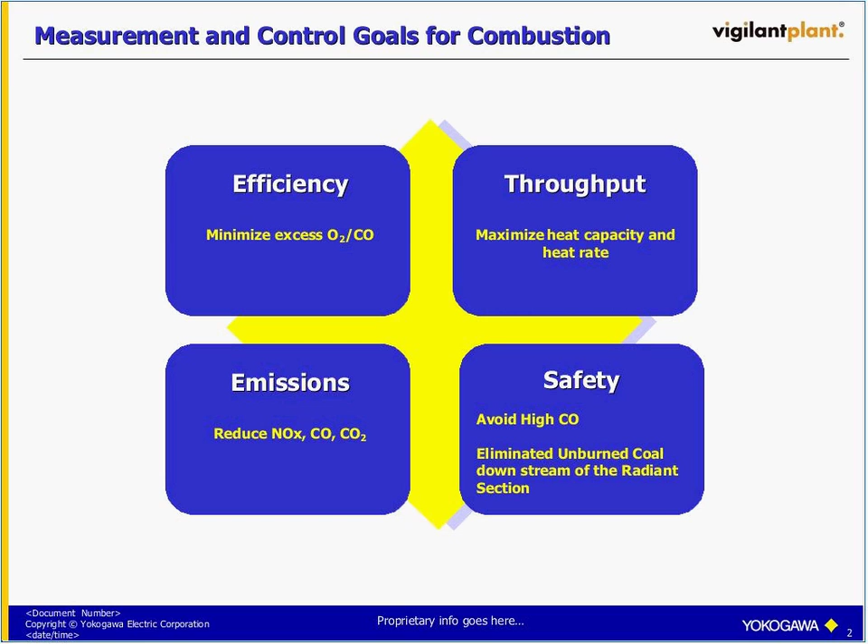In the past, the primary means of understanding what is taking place in the combustion process has been measuring oxygen, and there are several reasons for that. First of all, it has been the easiest to measure. The zirconium oxide technology has a very long track record and has been proven reliable and is obviously well documented. The average oxygen content of the flue gas typically changes in a very gradual manner when the conditions are changing, and those conditions can be quite vast.

CO, on the other hand, has been very challenging to measure for the industry, despite many efforts of many kinds. Even when you are able to measure it effectively, the dramatic changes of concentrations can make it difficult to control off of. So we are not advocating control with CO, but rather using CO breakthrough as an indication of the optimal excess O2 level.

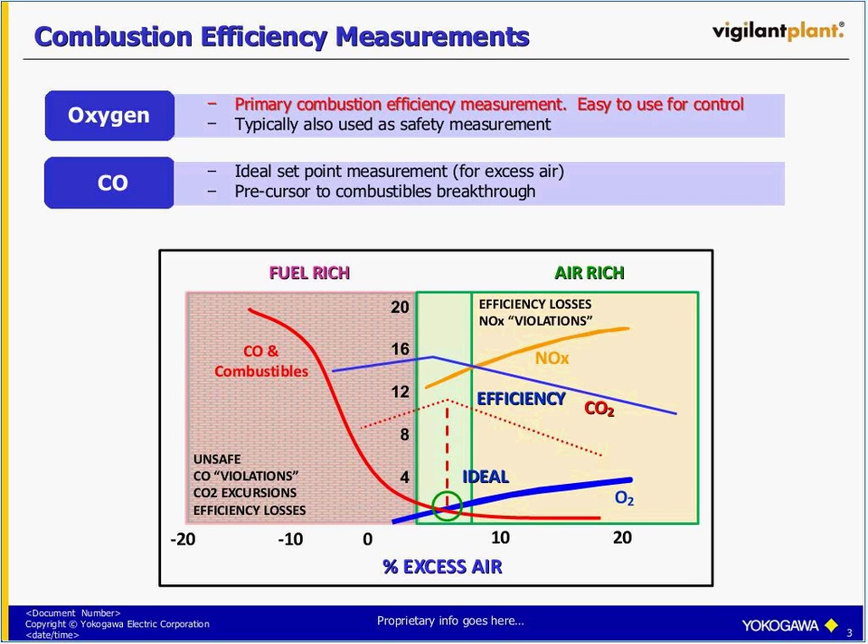On the chart here, it's a fairly typical graph showing the relationship between oxygen and CO, where on one side you're fuel-rich and one side you're air-rich, and the goal is to meet somewhere in the middle. But where is that optimal O2 set point?

Some people have said that on their system it's 2% or 1% excess oxygen. Some plants run at a much higher level. But we believe to gauge that, you must have some type of indication other than just oxygen, because there are many factors to consider.

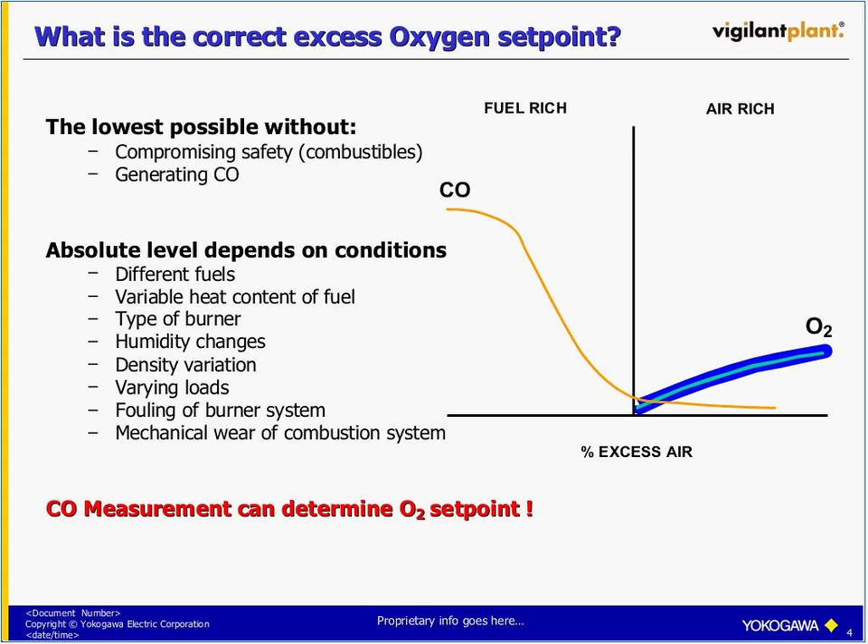So we think that it is the lowest oxygen set point possible without generating carbon monoxide. And all of this can change continuously in your boiler with different BTU values of your fuel, different burner wear. They're not all burning the same. Several factors can contribute, and that is why we believe the diagnostic of a CO measurement can absolutely determine where that O2 set point should be.

On a gas-fired system, safety is much more important because the raw fuel can be explosive downstream. So in many cases, when they do not have a diagnostic of carbon monoxide or any type of fuel downstream, they run on the safe side, which is the air-rich side.

So before these analyzers, these tunable diode lasers, were installed on their process, they ran at an average of 4.5% oxygen. But after they installed these TDLs, one measuring carbon monoxide and methane and one measuring oxygen, they had an operator test where they drove the oxygen value down.

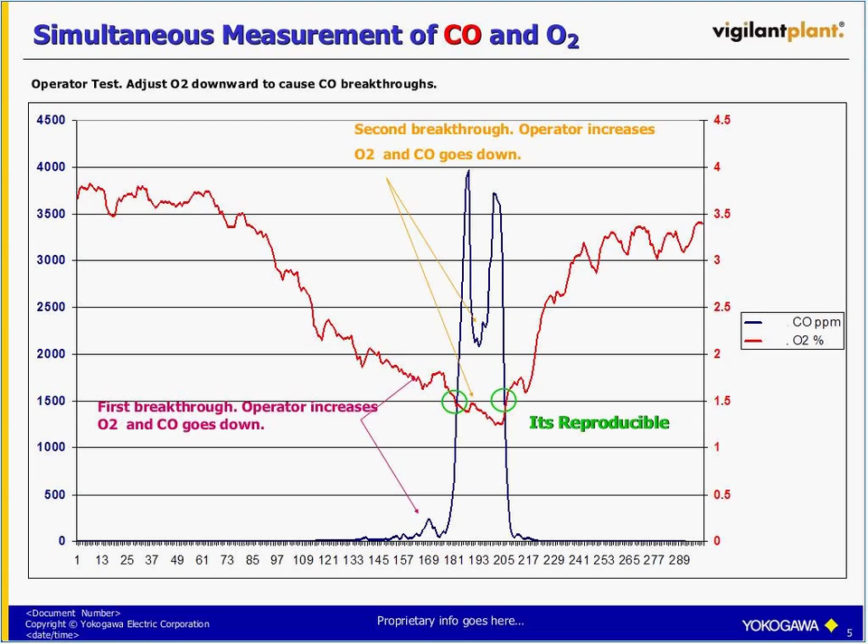So this is basically a summary of what we've talked about so far. The ability to detect carbon monoxide crosses a number of key factors in the combustion process. So not only does it allow you to reduce the amount of excess air, which increases heat capacity, but also gives you an early indication of a fuel-rich environment.

There are some considerations that have to be taken when choosing a technology. Placement at a crossover or radiant section, nose arch, radiant, superheater, before the CO has a chance to afterburn or react with oxygen and convert to CO2.

Also, coverage across the burners to measure breakthrough at any one point. We call it a path average that the laser is performing.

Sensitivity to allow parts per million measurement, which would result in a safe O2 level, speed of response to allow reaction to changing conditions, and low to no interference from other combustion gases such as CO2, moisture, or any type of combustible.

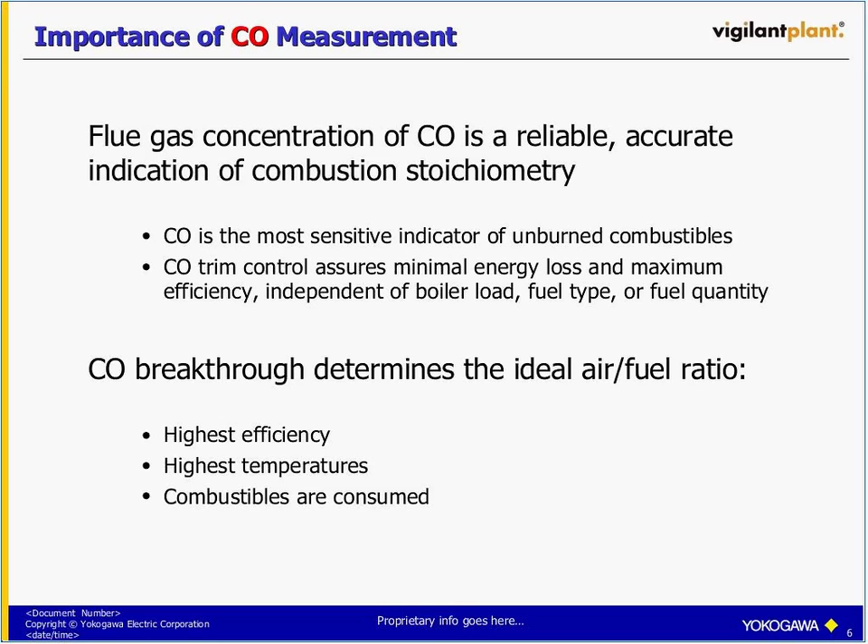So why isn't everyone in the industry making this measurement? Well, most of the technologies that have been available were not designed specifically with pulverized coal business in mind. One of the original technologies for measuring combustion gases that had early and sustained success was catalytic bead sensors.

A later revision to the technology was using a solid-state metal oxide semiconductor. This eliminated the consumption of the catalyst and extended the life of the sensor. Even with this advancement, the sensor must come in contact with the target gas to generate a signal.

Another analytical technique that was implemented for measuring combustion gases was the NDIR, or non-dispersive infrared filter photometer. The design of this system is much more conducive to the harsh nature of the coal power industry. The main reason for that is the sensor never comes in contact with the process. This greatly extends the life of the sensor, and it works on the principle of infrared vibrational absorption spectroscopy.

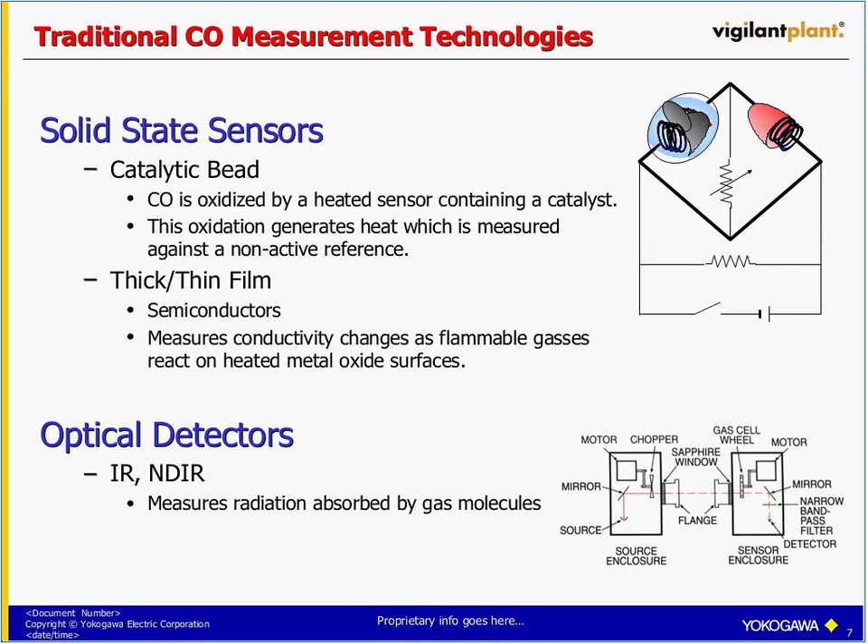The solid-state sensor technique, because of the harsh environment, has to have some type of extraction system, meaning that you have to take a sample out of the boiler, put it through some type of filtration system to clean it up, and then pass the flue gas over the sensor.

So because we have a filter involved, this filter has to be cleaned, and you could imagine with the mass of fly ash that's going by, that filter would need to be cleaned very often. So while this system can work, it does require a lot of maintenance.

So this also only gives you a single point of measurement, whereas a boiler can have a very large volume. You're just pulling out a single point of the boiler to try to represent what the overall value is of the carbon monoxide.

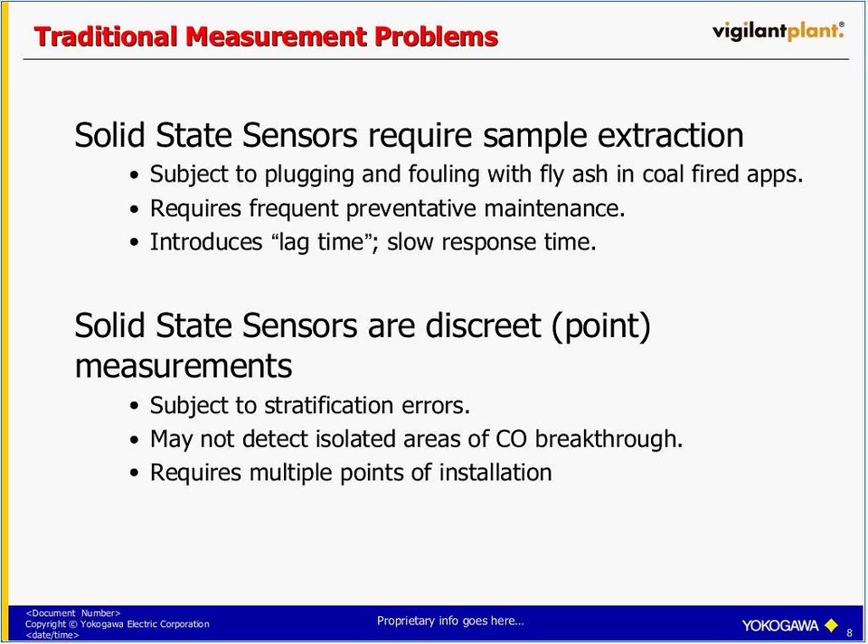The NDIR technique, while having superior advantages, has some limitations. One of those limitations is temperature. And this type of technique can only be applied downstream of where the actual combustion is happening. And when you take a measurement of carbon monoxide far from the fire, you're getting a false low value because the CO is reacting into carbon dioxide.

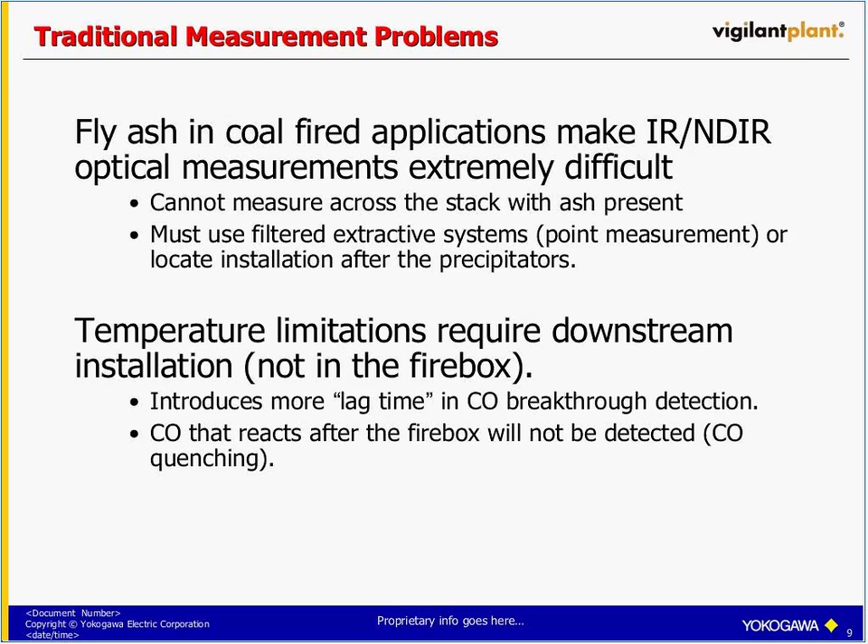So with the traditional or early techniques of measuring carbon monoxide, there were also some accuracy considerations. With the solid-state sensors, the catalytic bead or the thick-thin film sensor, the accuracies list 2 to 5% of reading. But that's not necessarily what the actual reading might be. NIST and several other affiliations have performed their own tests, and these accuracies have been a little bit more loose than the stated accuracies from the manufacturers.

The thick-thin film sensors also have a little bit of interference from SO2, NO2, and water, which can be inherent in combustion gases. Also the NDIR definitely has interference from CO2 and water, which in any combustion is the goal, is to have CO2 and water, which are the radiant gases.

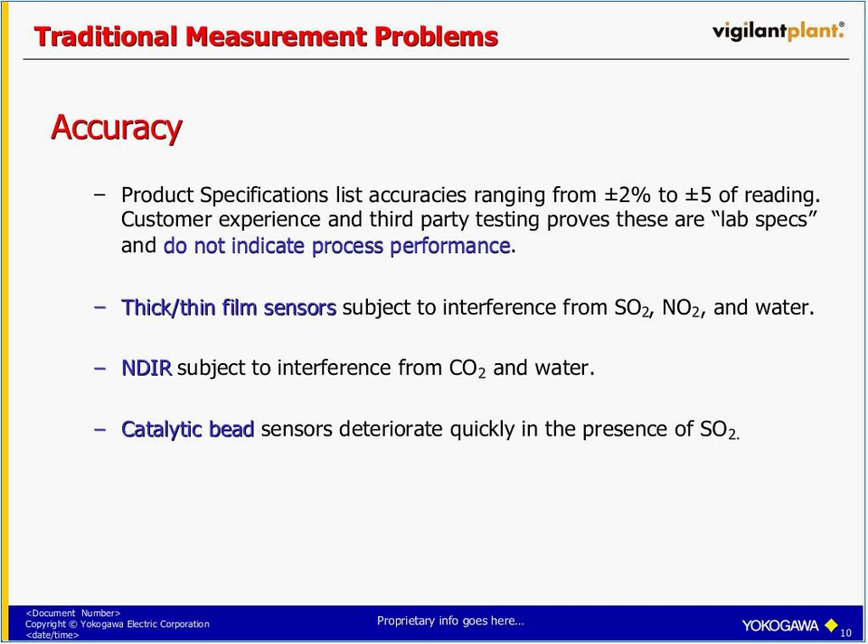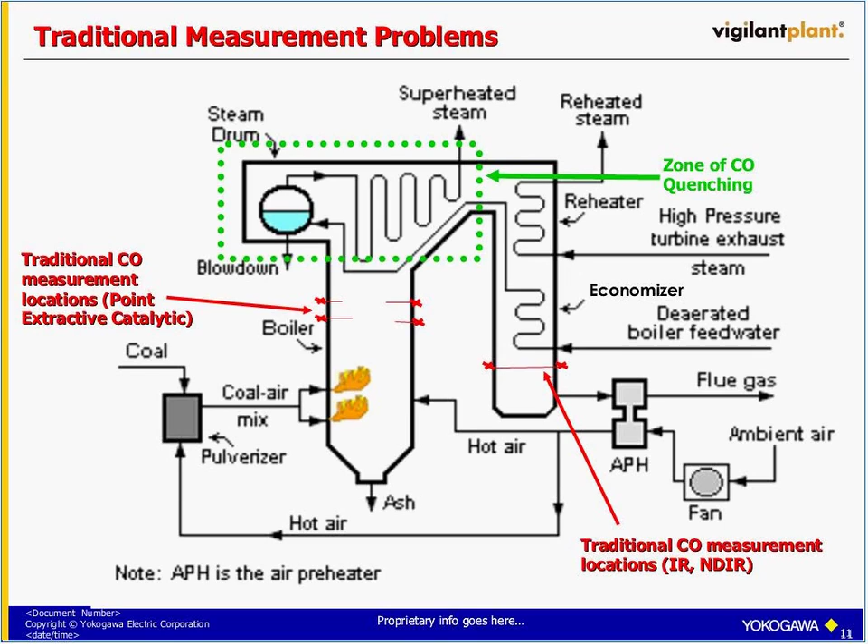But as you can imagine, you have this fly ash in a plasma-like state, and trying to pass that through any type of filter system can be incredibly problematic. And then to deal with the temperature limitations of the standard infrared type analyzers, it had to be downstream of where the CO is being quenched. So these are the considerations for the traditional technologies.

So I'm not going to go into great detail about the TDL technology, but it too is an optical device, and the sensor does not touch the process. However, this laser technique does not have the same temperature limitation, so we can utilize this technique anywhere in the process, whether it's hot or cold. So, to give you the optimal CO value, we can put it directly in the radiant section, superheater, etc., to give you that most realistic CO value.

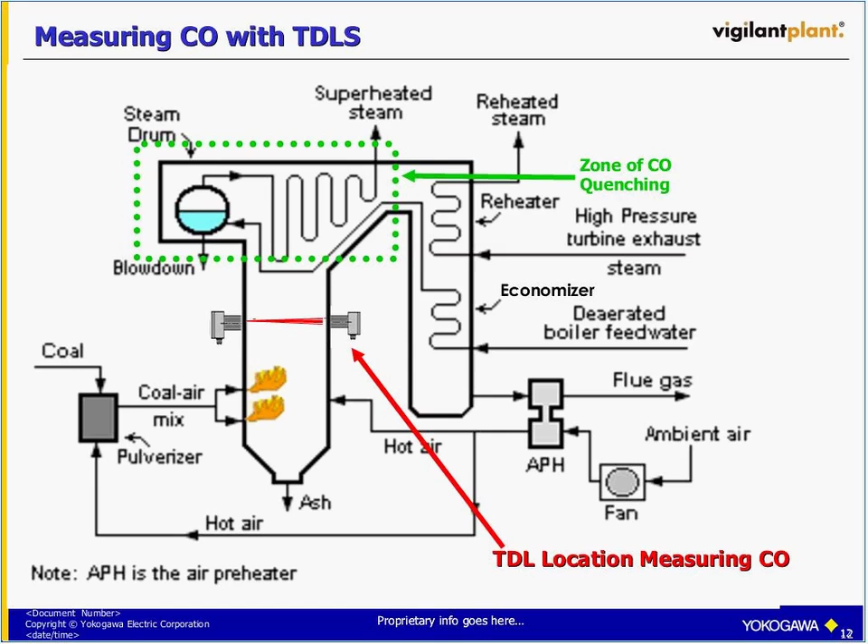So some of the simple advantages of a tunable diode laser system is that we can give you that measurement in the firebox, which gives you the most representative measurement. Also, it is an in situ or across the firebox measurement. So we have no sample system which could potentially fail or need maintenance. Also, this reduces the lag time.

Most TDL systems have a response time of less than 5 seconds, and this is a full step change, whereas most analytical techniques have a time response factor, and this can be 30 seconds, a minute, 2 minutes.

Also, this optical technique, whether it's NDIR or TDLS, gives you a path average measurement. And this simply means that we're counting up all of the carbon monoxide molecules in between the source and the detector, and then averaging that over the entire span. So we're giving you basically an infinite number of points all in one measurement.

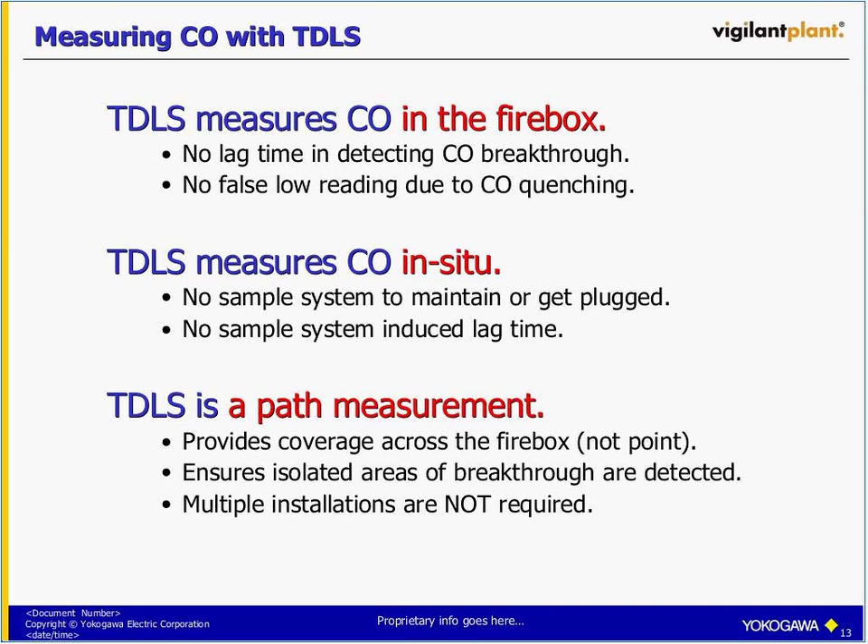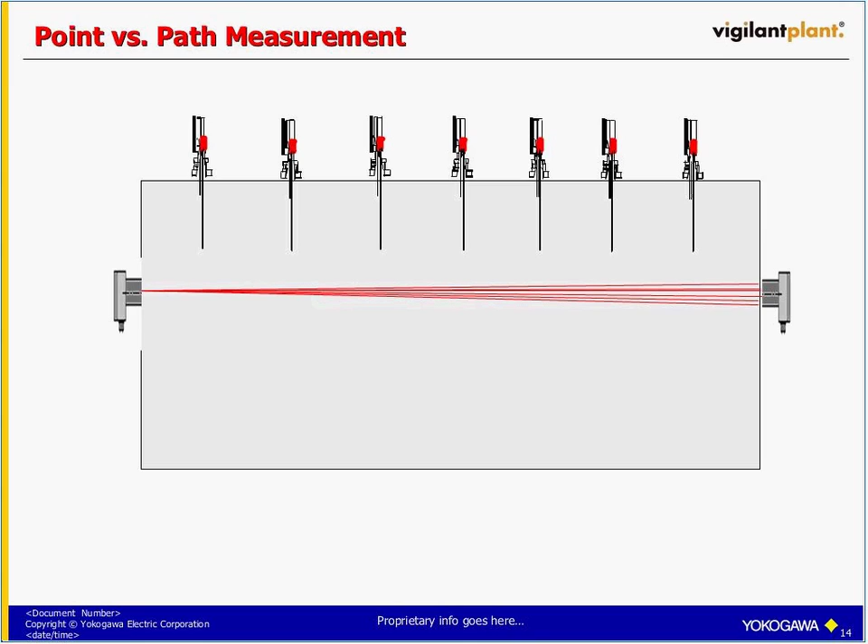With one tunable diode laser analyzer, you get the entire path average with just one instrument. And the reason that this is important is because stratification is inherent with any combustion system.

This graph you see here was made with a portable oxygen analyzer, and we just held a probe out at different lengths over an area of the radiant section and found that there was a dramatic difference in the oxygen concentration values. Now, these values would directly reflect what the carbon monoxide values were. Where you would have low oxygen, you would have high carbon monoxide. So one specific analyzer would not tell you what each area is, but rather give you an average of the whole.

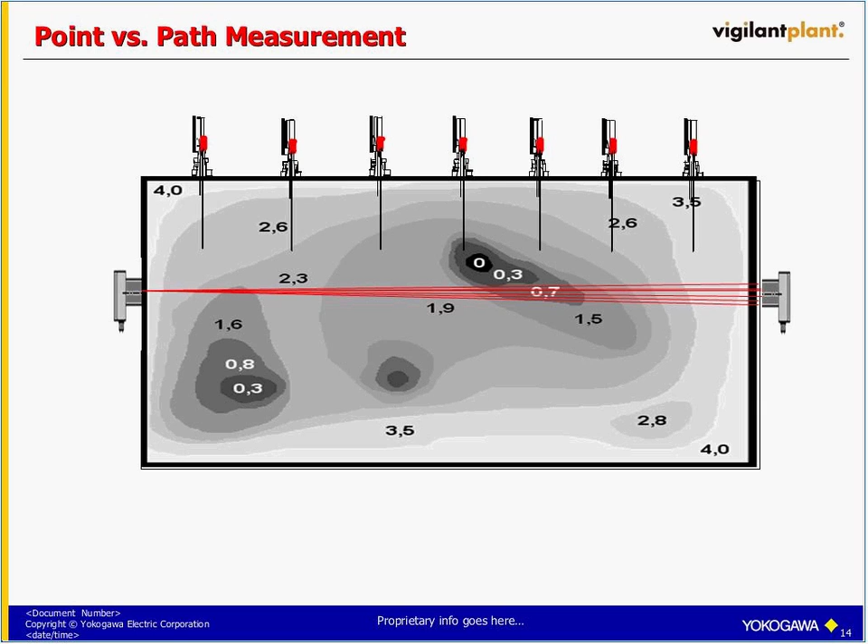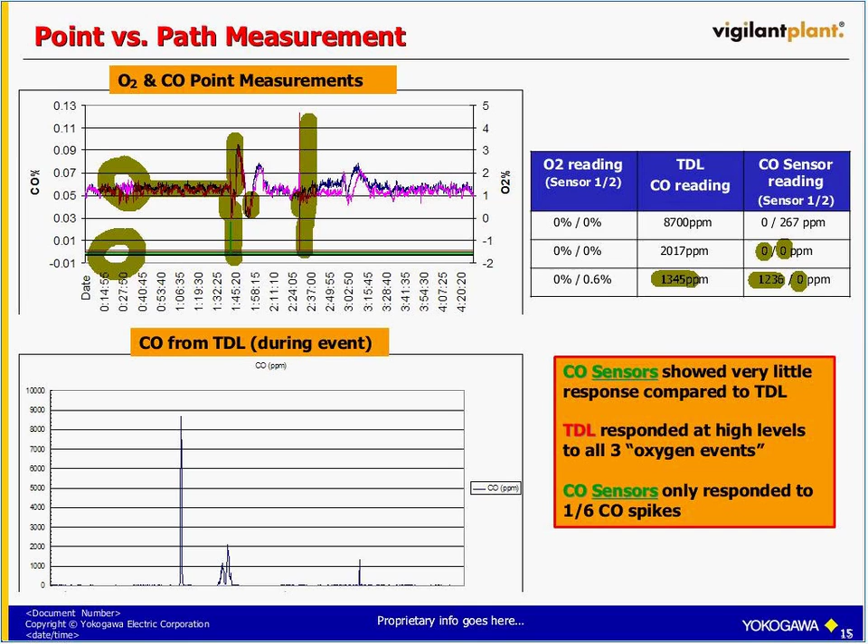So this graph is specifically designed to help you understand the advantage of a path average over a single point sensor.

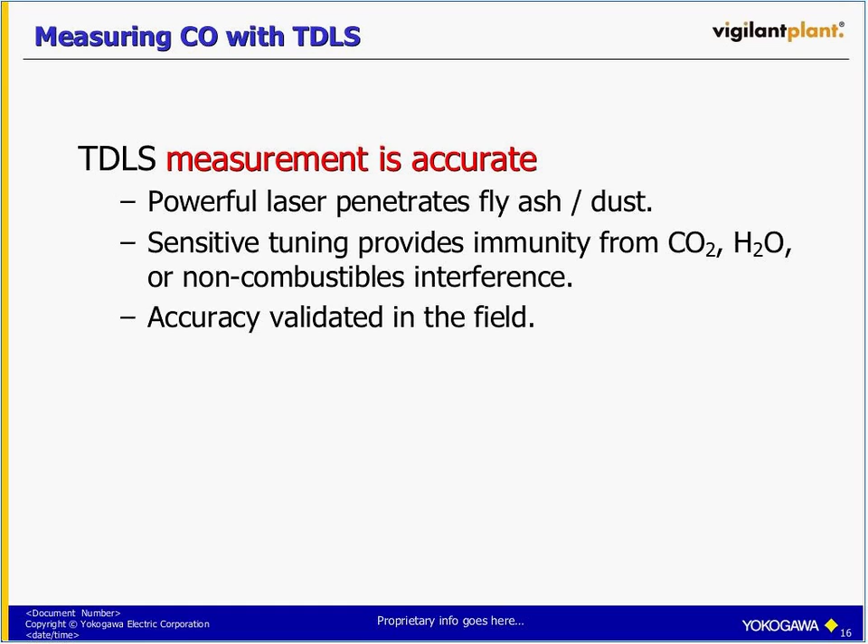Some of the simple advantages, as an attribute of the type of technology, is the accuracy of the TDLS system. We are using a very coherent light, a monochromatic light, producing a single color, and we can focus that light to whatever size diameter beam that we need for the distance across the boiler. Because we're only producing one wavelength of light, we can be very specific in just measuring the carbon monoxide infrared absorption and not have to worry about CO2, moisture, SO2, or other gases that could potentially interfere with other types of technologies. And we've also validated this information in the field.

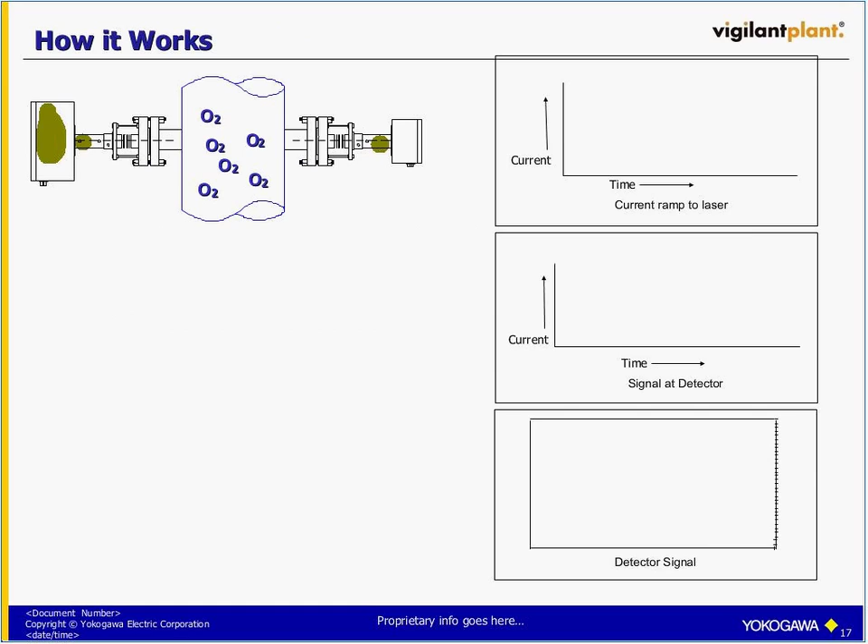So how the tunable diode laser system works: on the left-hand side here, we're showing you our laser controller, this box here. This has a computer in it and a laser controller. And then we have a laser that's inside of this barrel that's mounted directly in line with a detector on the other side. Whenever we turn the laser on and tune across the peak of interest, which is why we call it a tunable diode laser, we introduce a small amount of current change over a constant period of time. And this happens at a rate of 1 kilohertz, or 1,000 times a second.

So what the laser driver is showing is this current ramp here in this box. What the detector sees on the other side, if there's any CO gas present, or oxygen if that's our target, would be here. You would see a loss of light over the current ramp. We take that signal produced from the detector and amplify that milliamp signal into volts in this box here, and then transmit that back over to the controller for interpretation. We take 1,000 measurements a second over about 5 seconds, which we can do more or less if the customer wants. And what the analyzer would interpret is this absorption peak here, and then we interpret that into gas concentration. It's a relationship between the amount of light that made it across and the light that is actually absorbed. And the delta helps us to interpret the gas concentration.

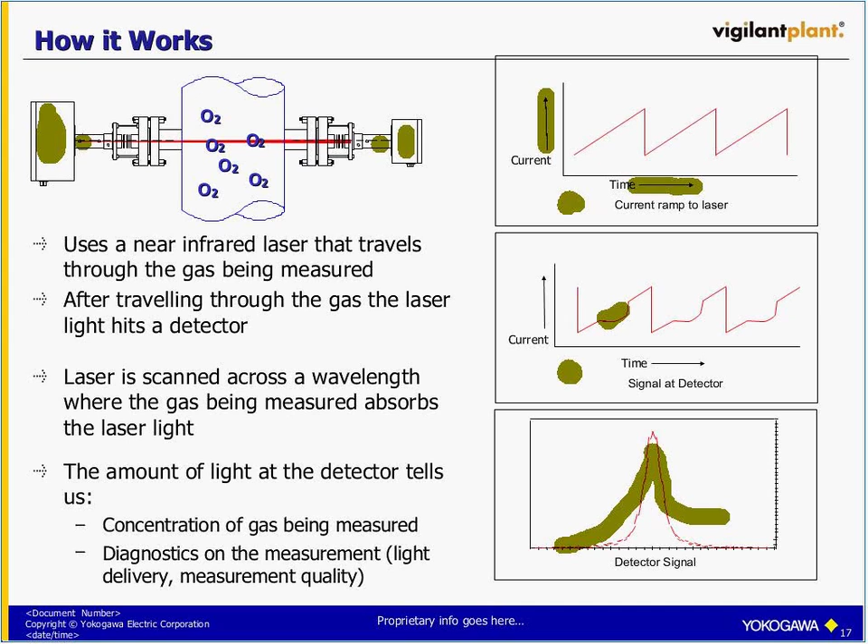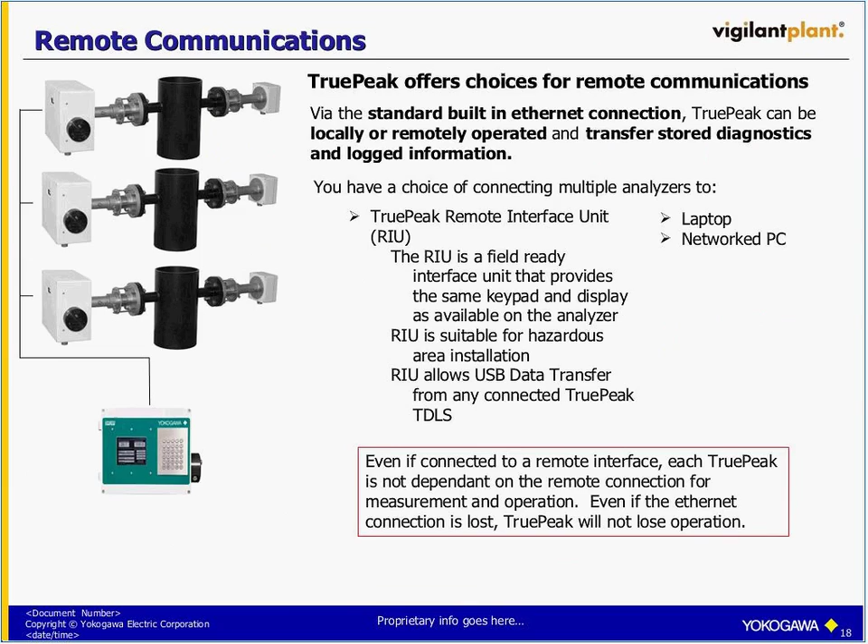So we seriously advocate the type of analysis we make by putting the laser directly in line with the detector. There are other tunable diode laser companies that transmit the light from a remote controller via fiber optics up to the process. Now, we have done a thorough investigation and due diligence on our part to try to find the advantages of this type of system. But we believe that having the laser and detector directly in line with no components in between greatly increases the uptime and reduces the failure rates of the system.

Now, one great advantage of having the laser and detector directly in line is that we can use a wavelength of light that allows us to have a very high sensitivity to carbon monoxide. To our understanding, these fiber optics have a bandwidth of light that they can transmit through them, and that bandwidth does not include the wavelength of light that we're using for this high sensitivity CO measurement. So our typical accuracy for a coal-fired boiler in the radiant section is about 5 ppm.

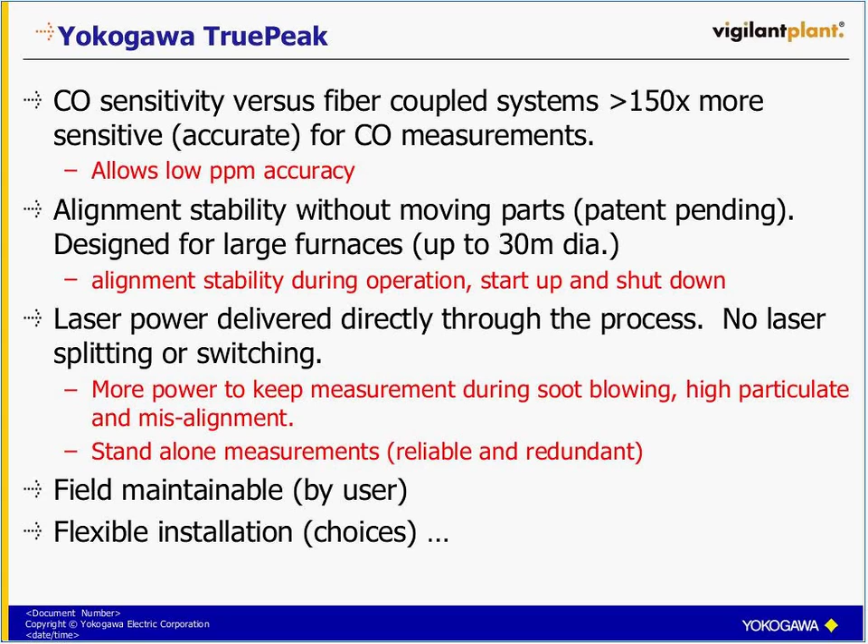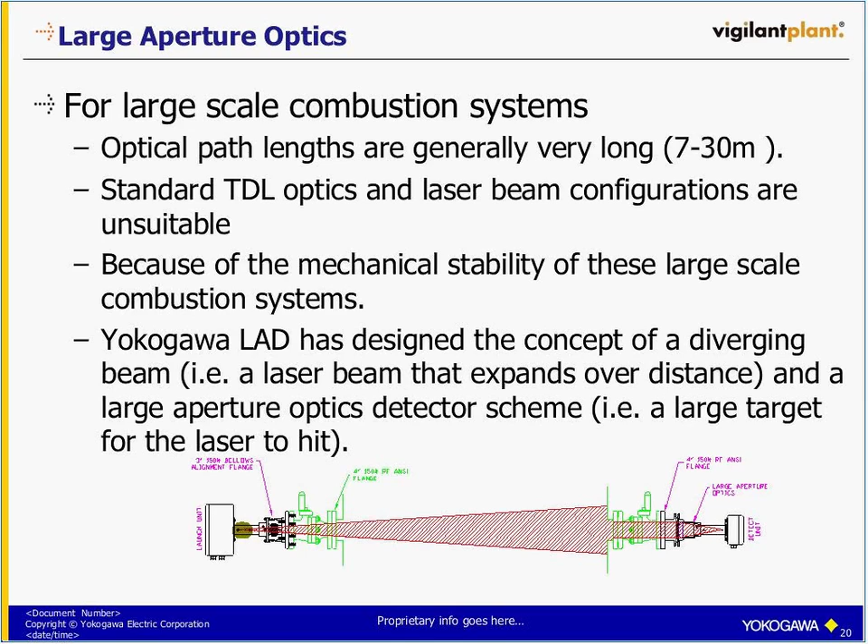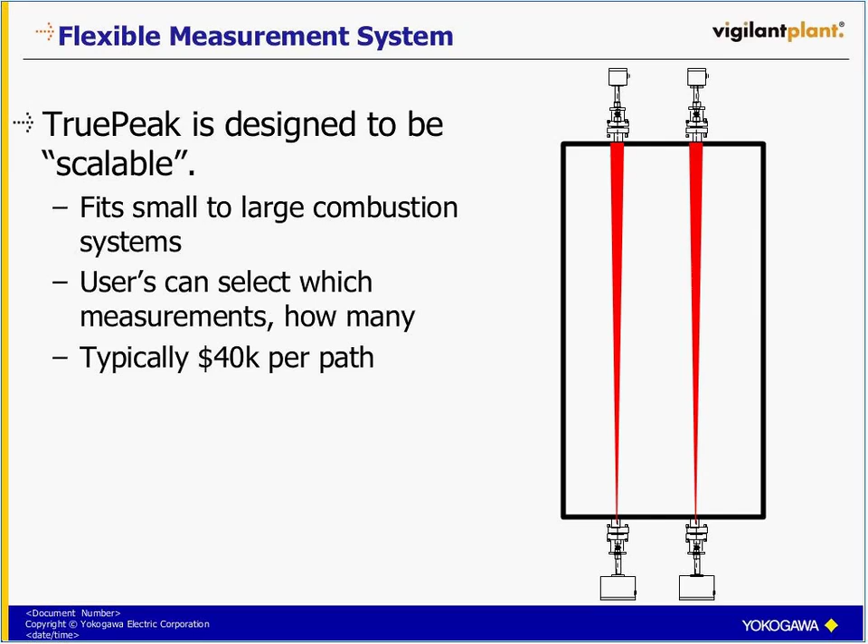So some customers say that they want to diagnose the different areas inside of their boiler where the CO is being produced. So this TruePeak system is a one measurement per one controller system, so you have true redundancy. If you have two measurements, it's two controllers that operate independently of each other. So this system is scalable on how many points of measurement the customer may want. There is no limitation of how many can be used, and these are all operating strictly independent of each other. So if one fails, the other one will keep working.

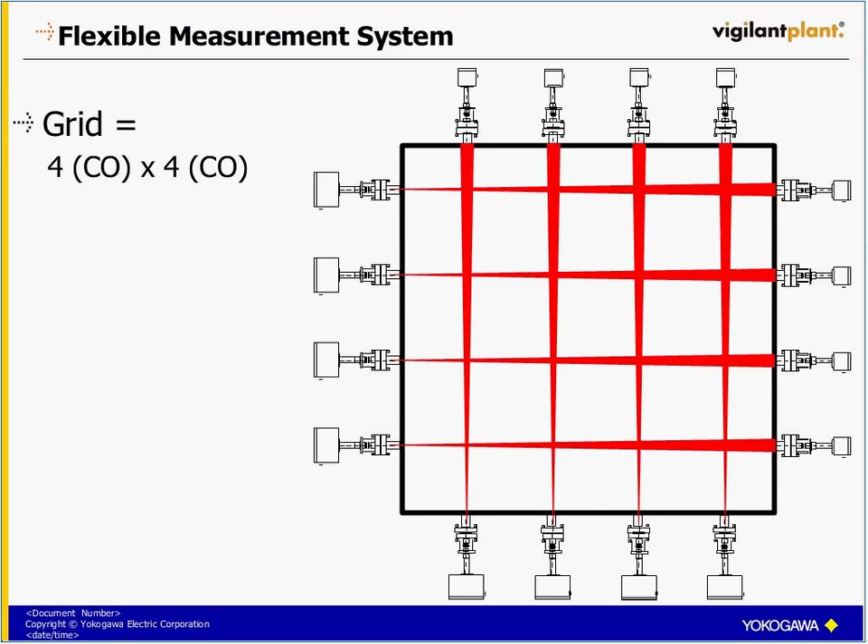So we have had a field trial in Wyoming, United States, a 650 megawatt pulverized coal-fired boiler. This was in the superheater section with a temperature that ranged, depending on the load, between 2,100 and 2,600 degrees Fahrenheit.

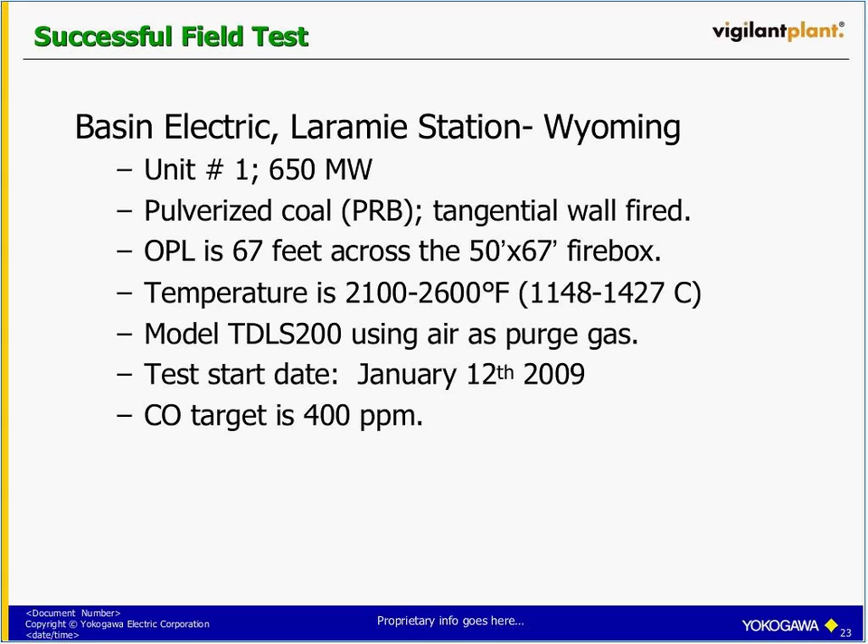So our group, the Laser Analysis Division, has been through a complete Department of Energy program called Advanced Diagnostics and Control of Furnaces, Fired Heaters, and Boilers. But this was specifically for the petrochemical industry. And some of the challenges were similar to what we found in the coal-fired industry, things like radiant light in the background, thermal expansion of the boilers. But going into coal, we had no idea just how extreme all of these variables would be and how much more greatly different they would be than in the gas-fired world.

So with our experience with the background light, we found that it was almost one order of magnitude greater, that is the frequency changes of light in the background, than it was in the gas-fired field. So we had to make some changes to our radiation filter on our detector, but we were able to meet that challenge. Also, because of soot blowing, we saw a vast dynamic range of the dust density inside of the boiler. However, we were able to make changes again to our detector, the way we amplify the signal, to deal with the difference between normal operation and when you have local soot blowing.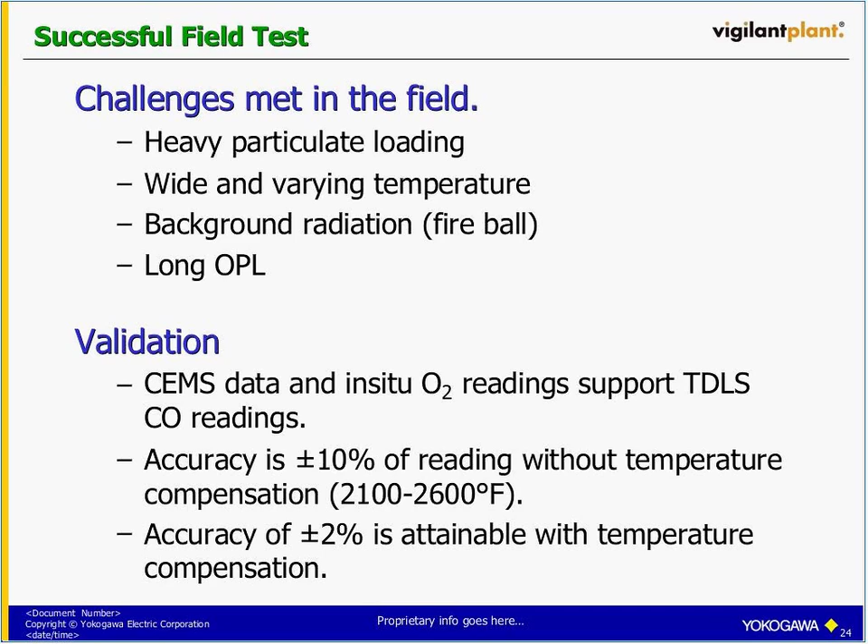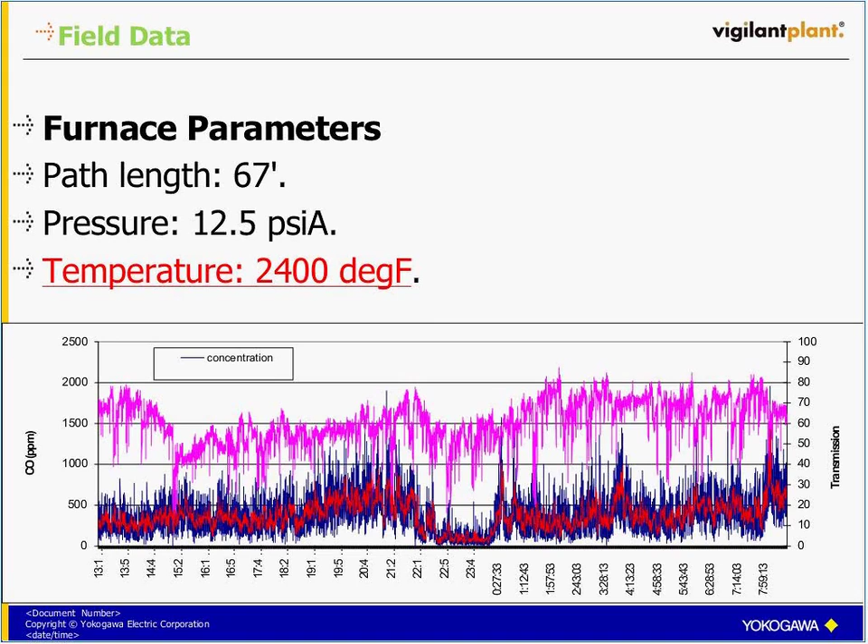So the type of boiler that we did our first test on was a tangential fired boiler. And from our understanding, a tangential and a wall fired have a similar profile as far as the amount of fly ash it produces. So we feel 100% we are ready to tackle any wall fired or tangential fired boilers. We will be installing 2 analyzers within the next month on cyclone-fired boilers that we will be evaluating separately. We want to be 100% sure that when we sell something it will work, so we want to put in our due diligence to do these evaluations.

So the critical parameters of consideration for a tunable diode laser system would be the optical path length, which we would obtain with your firebox dimensions. The temperature range, because that will have an effect on the fly ash density. And then what your expected and desired CO ranges and targets are.

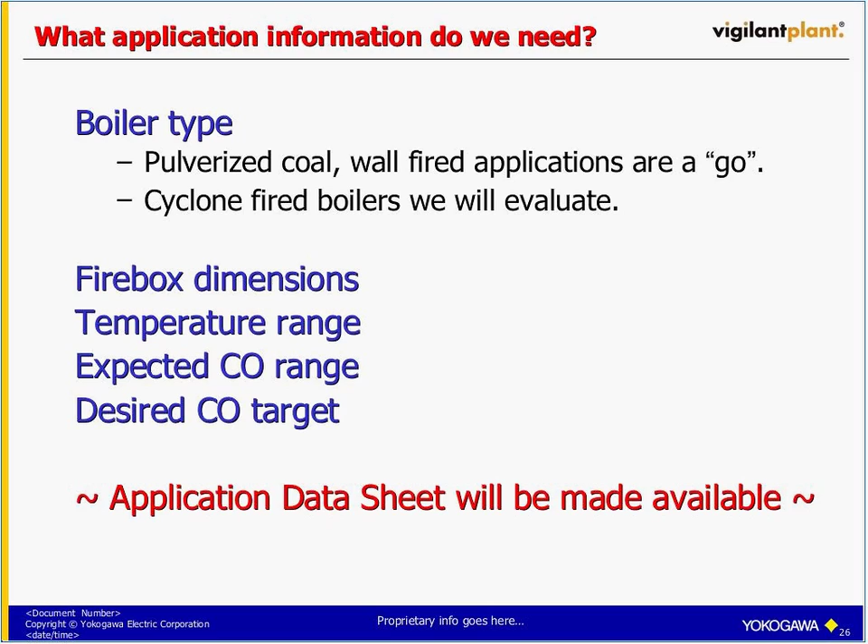So in the next 2 months, we will be installing a TDL analyzer with an oxygen laser to perform a full field trial test. So with our system, there's very small changes to hardware on what wavelength we want to emit for what gas we want to measure. So all of the field trial time and successful runtime on sold units that we have can absolutely go toward our oxygen analyzer, because it's just a single component. It's the laser diode that changes from CO to oxygen. So we're very confident with that.

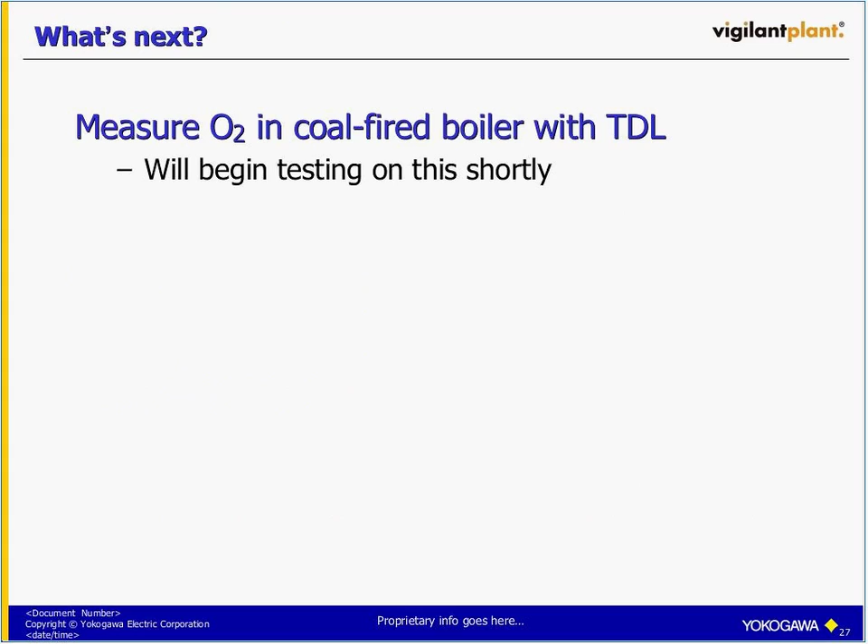I absolutely appreciate everybody's time, and I would love to take some questions. Thank you, Jesse. We do have a couple questions. First question is, what is the maximum distance between each TDLS?

That is a great question. And it's not a set value because conditions in each boiler can be different. I said during the presentation that we have done up to 67 feet, but we were still getting 50% of the light transmission. So I would feel absolutely confident that we could do up to 90 feet or maybe even 100. But again, the key variables would be what is the temperature, and then what is the dust density, what is the mass per volume, and that can be a tricky number to obtain. But if we know the mass per volume, and then we know the volume and temperature, our spectroscopist can give us an expected transmission value, whether it's 1% of light transmission or 20% of light transmission. They can accurately predict that.

Okay, and we got a couple more. Can some TDLS or TDL devices measure both CO and oxygen at the same time? It's a very good question. If the question was TDL devices, I guess it would be no, if it was a tunable diode laser, because the laser emits a very narrow wavelength. But a device, if you had one controller with both an oxygen laser and a CO laser, I do believe you would have to alternate between lasers in that one device. So while one device could potentially measure both gases, I believe you would have to alternate between which gas you measure at one particular time. Does that answer the question? I believe it does. If not, okay.